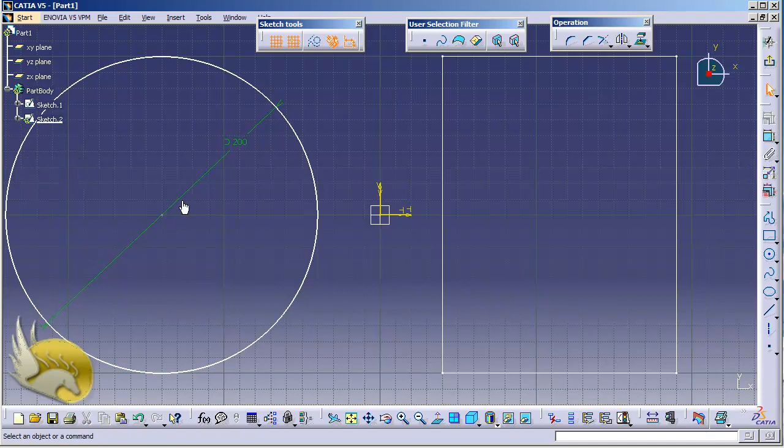Right now I have two sketches, and I'm going to pad these two sketches. I want to have the first one about 50 millimeters, so I'm creating a cylinder here. And I'm going to select the pad tool again and select this sketch, and 50 millimeters is okay for this second tool. So I'm going to create a hole, and I'm going to select the face of this object to create a hole on that.

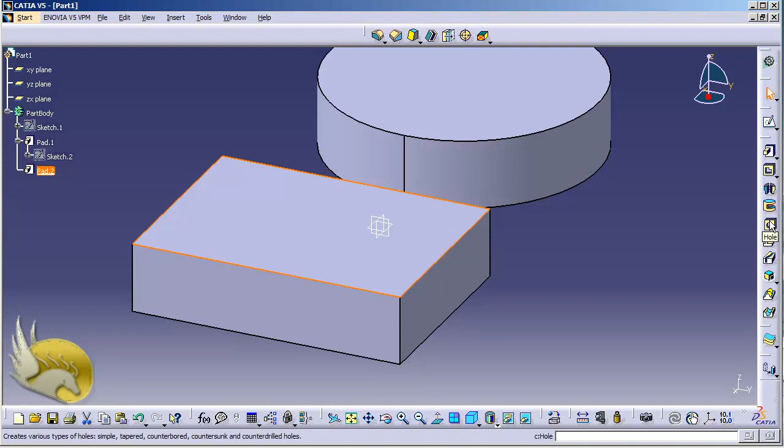So I select this face, for example, and go to select the hole tool from the sketch-based features. Of course, you can go to insert menu and select sketch-based features here, then select the hole tool from here. Now you can see a grid here that will help you to move your hole in that. And for this, I'm going to press Control Page Up a little bit to zoom here.

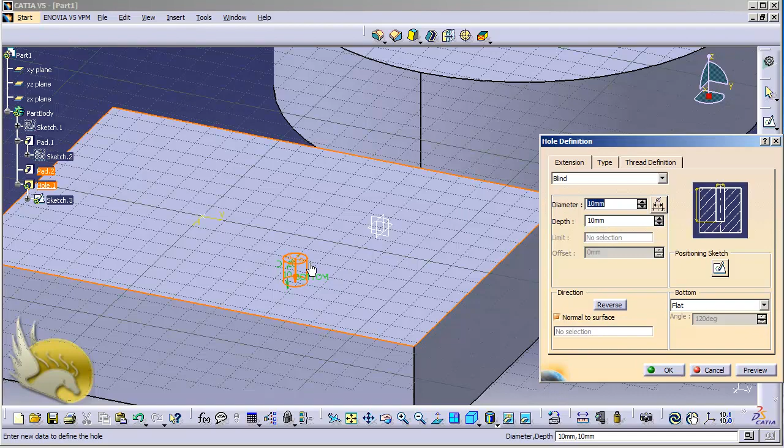Now you can see that I can grab this hole and move it around wherever I want to have this hole. This is okay here. Of course, you can use the exact location of this using constraint. If you want to do this, you can click on positioning sketch here, and now you can see that I am aligned to this line.

Let's zoom out a little bit, and now I can use constraints to move the hole point. I click on this and click on the edge, and you can see that I have a constraint here. I want to have this about 20 millimeters, and again I select constraint, select this point, and select this line. And now this is going to be 20 millimeters again.

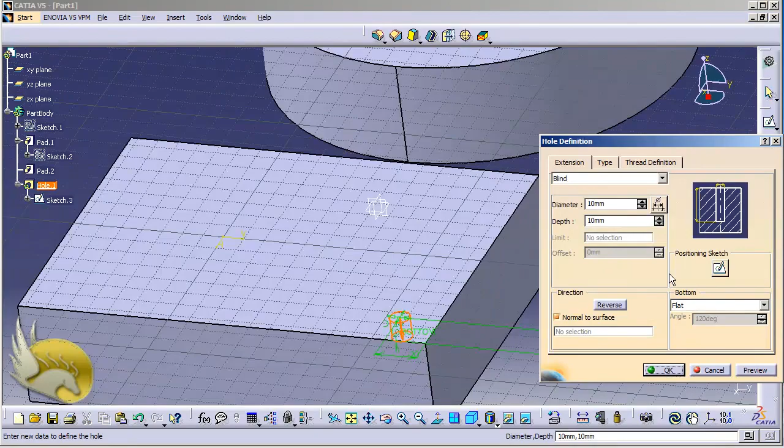So I have positioned this, so I exit my workbench, and now you can see that my hole is here. So I can set properties of this hole using this dialog box. You can see that the type of this hole is blind. Blind means dimension, that you're actually entering the diameter and depth of your hole here. Of course, the dimension means the depth of this hole.

So if you want to have the depth of this hole through the whole object, you can select up to surface, for example, and select the other surface of this object. Of course, you can use up to last. That means the hole is going through the whole body of your object. And of course, you can select up to plane, up to next, and select the plane or select the next object on the way of your hole.

So I'm going to have it blind, and I'm going to specify the dimension. The diameter is 10 millimeters. That's okay. I'm going to make the depth about 20 millimeters. So this is going deeper.

And of course, I can click on this little arrow here, or click on the reverse button here and change the direction of the hole. This doesn't mean anything because I'm not going to create a hole in the air. So I click reverse again and go back to the correct direction.

So in type here, I can select the type of hole. You can see that this is a simple hole. This has no groove on it. If I want to have this, I can select different types of hole here. For example, if I want to have some angles, I can select tapered. You can see that the angle is going to be defined here, 90° by default. I'm going to have it about 45° and see the result here.

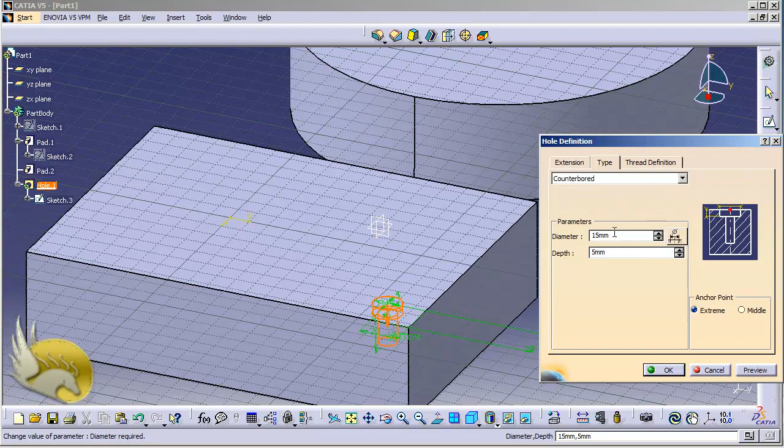And of course, you can change the diameter and depth of your hole, and you can of course design it using this button that opens a dialog box to select the definitions that you want to have. I want to click cancel and go back to my previous dialog box.

You can see that I have countersunk here, like the holes that you create on MDFs or cabinets or wood or anything else. And you can of course define other parameters, and there is a counterdrilled one, and this is the type that you can see the preview of here. So I'm going to have it as simple.

So let's go to thread definition. In extension, I still have the 20mm and 10mm. I go to thread definition. If I want to have some threads, I will click on threaded, and now I can start defining the type of thread. Its type is dimension. I can of course change it to up to planar support depth. I'm not going to talk about these.

You can see that thread definition is like this. I'm going to have thin pitch. Now that I have thin pitch, I'm going to select the type of thread. These are specifications that are standards. I'm not going to talk about this because I do not know anything about these types of standards. You are the one who is supposed to know about this.

The thread depth is 10mm and the hole depth is 20mm. I'm going to have the thread depth as much as the hole depth, so I put both of these to 20mm. You can see that I can select right threaded and left threaded. Right threaded is the thing that I want to have.

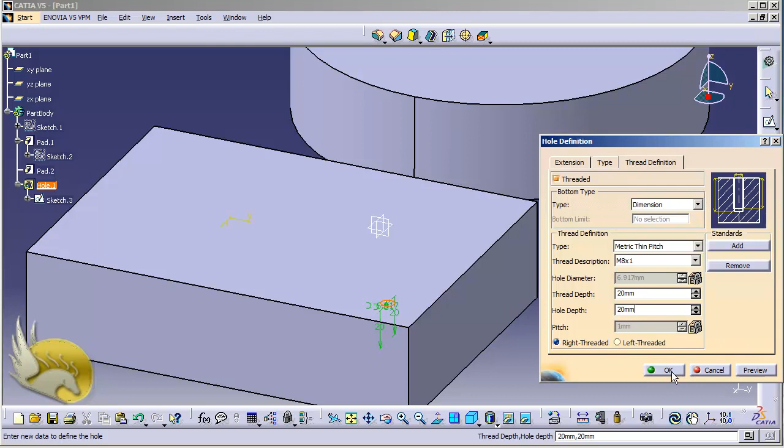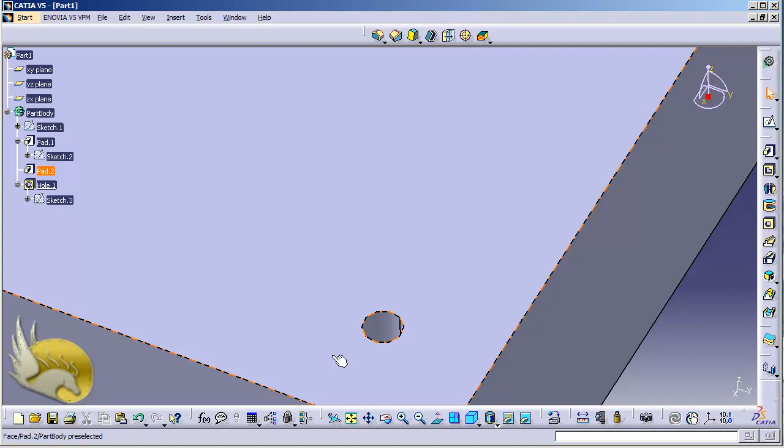I click on OK. And of course, I cannot see the grooves because of the problem with my graphic card if I zoom in, but you may see the grooves that you have created here by zooming in and selecting the hole. So you can see that my hole is here. I have created this, and we can use it to replicate and put it anywhere else, and I will show you how you replicate your object in the next section.